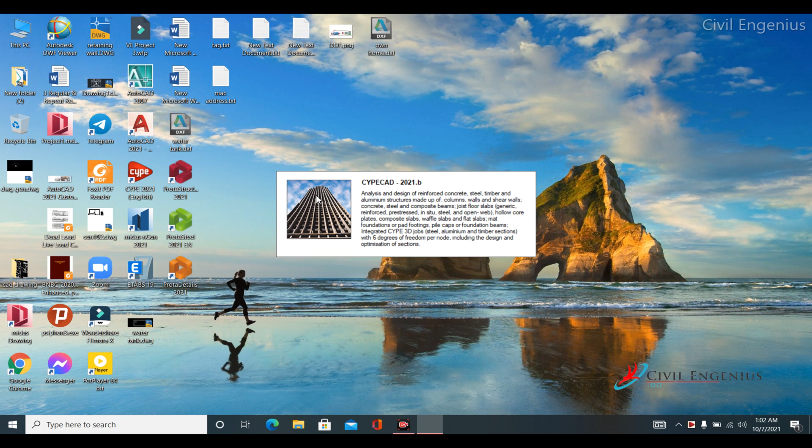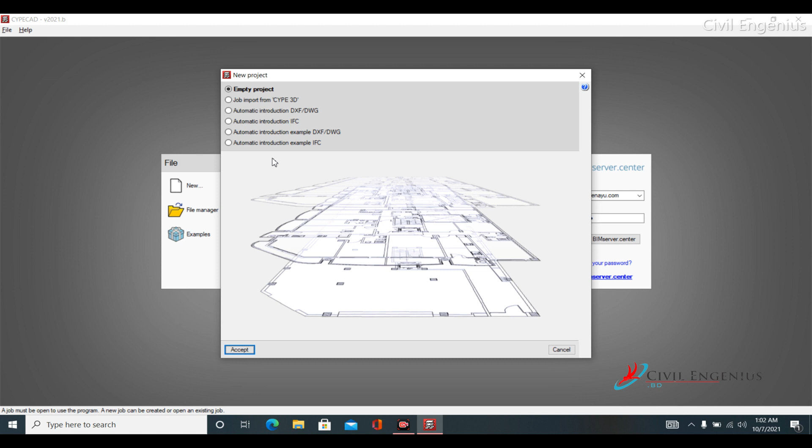Today we will see how to analyze and design an underground water tank in CYPECAD. So let's get started. Open CYPECAD. We will start with a new project. File name. Click on accept. Click on no. Select empty project. Accept.

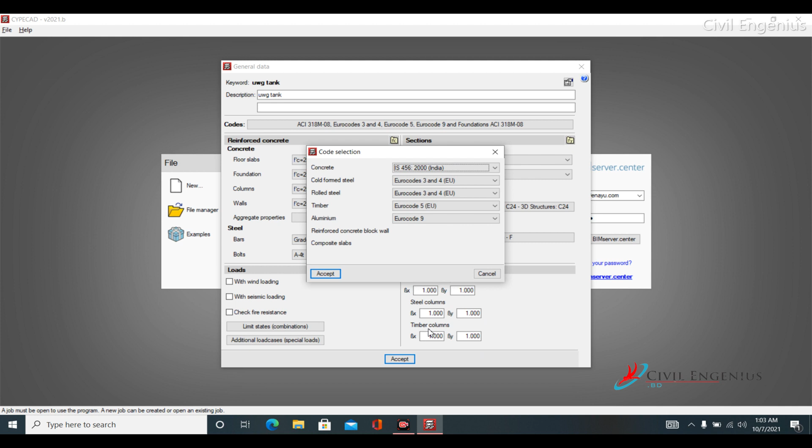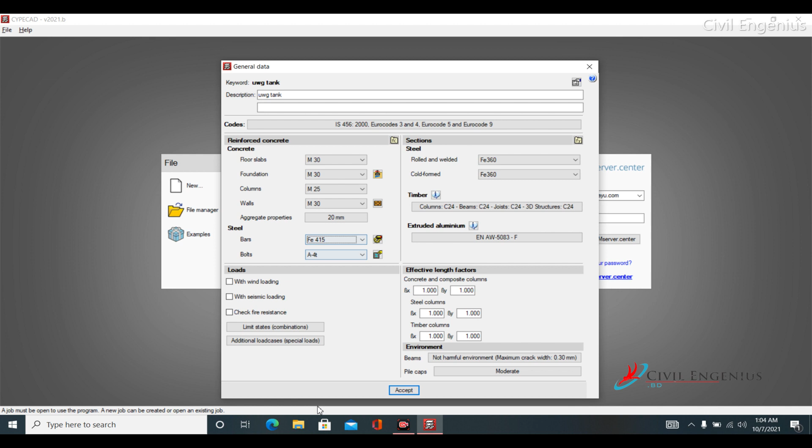Here we will select our design code. Concrete. I will go with IS 456 2000 Indian code. Click on accept. Yes. Now select concrete strength: M30 for slab, foundation M30, wall M30. Aggregate properties I will keep 20 mm, accept. Steel bars I will keep 415, click on accept. Okay, click on accept.

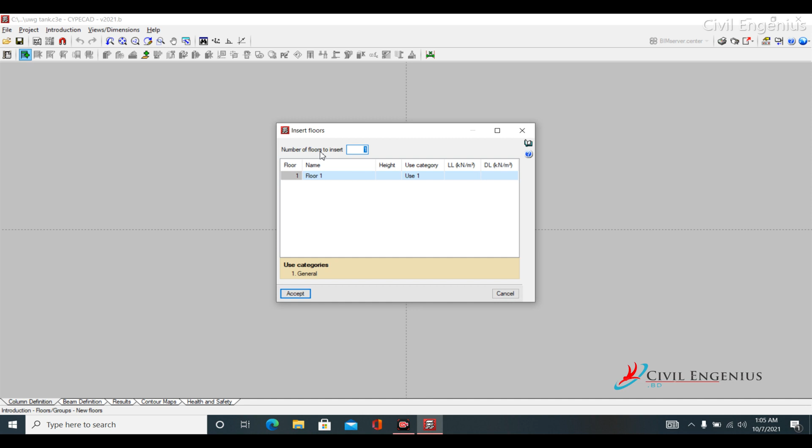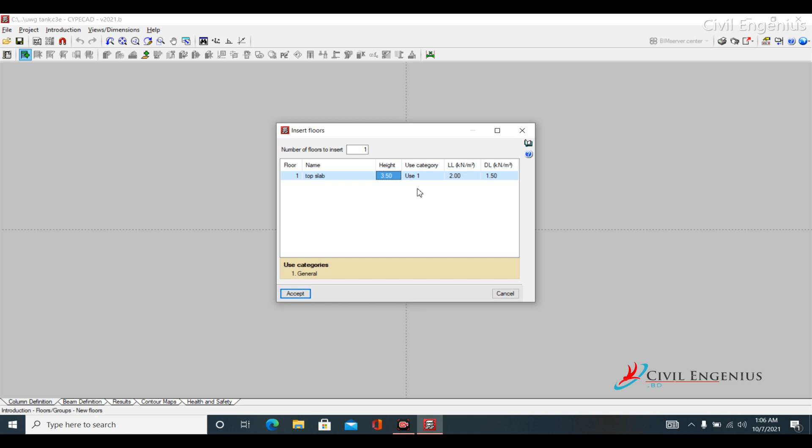Now go to story definition, new floor, keep single, accept. Number of floors to insert 1, rename it top slab. Live load on top slab 2 kN per meter square, dead load like floor finish I will keep 1.5 kN per meter square. Water tank height is 3.5 meter. Click on accept. Now go to edit floor.

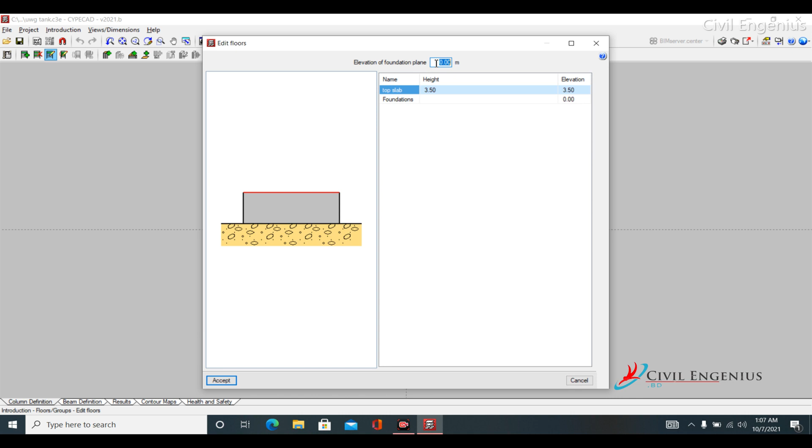We can see here our story is on ground surface. As an underground water tank, it will be inside the ground, so elevation of foundation plane minus 3.5 meter. You can see here the floor has gone inside the ground. Rename foundation bottom slab. Click on accept.

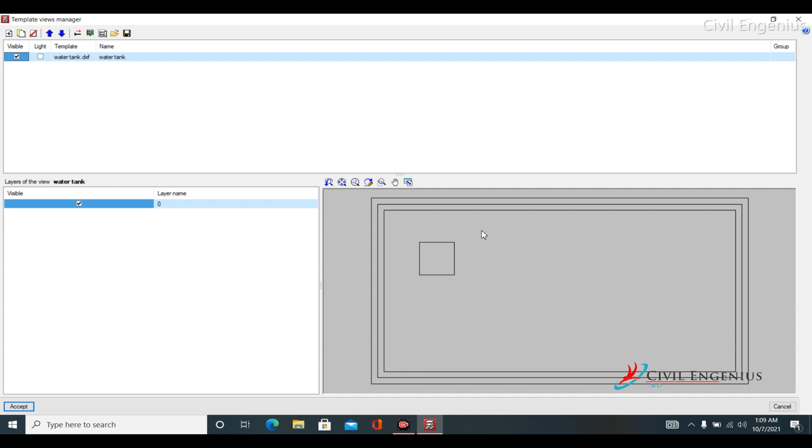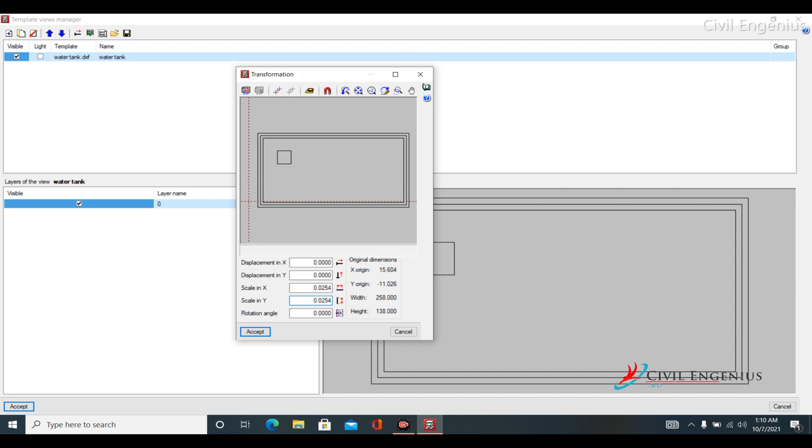Now add DWG file. Click on DWG file. Add water tank. Accept. You can see here our plan. My drawing is in inch scale, so I have to convert it from inch to meter. Click on scale, x direction 0.0254, same as y direction 0.0254. Click on accept. Yes, this is our plan.

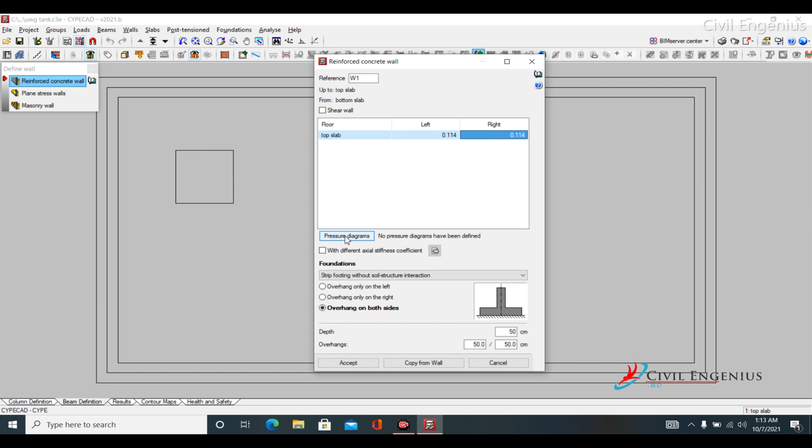Now go to beam definition, go to wall, define wall, reinforced concrete wall. Our wall thickness is 9 inch, so left side 0.114 meter from center, same as right side. Click on pressure diagram. Pressure diagram list.

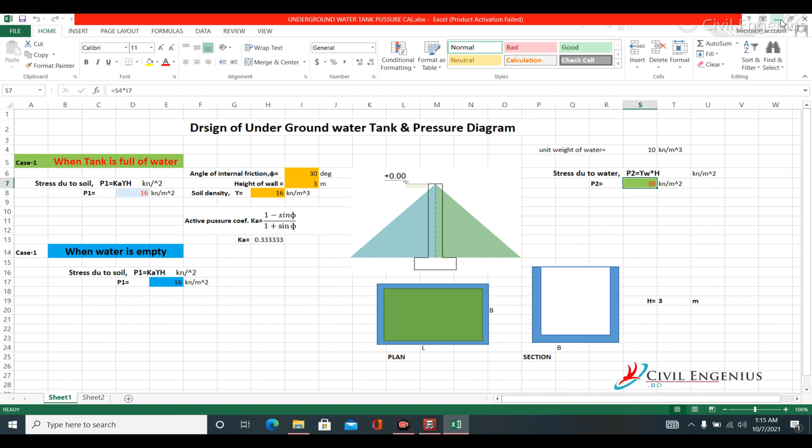Now add soil pressure. Soil pressure with infill up to elevation I will keep 0 meter. You can see here at the top soil pressure will be 0. Unit weight of soil, I will keep it 20 kilonewton per meter cube. Submerged unit weight is applicable for water table. If you have any water table, then you have to input this value. If you want to add water table, just click here and input elevation height. I will go without water table, so uncheck this.

Internal friction angle, I will keep it 30 degree. This value will be changed according to your soil report. You can also select from here, then send, accept. Yes, you can see here the change. Internal friction angle 37 degree. Now I will keep it 30 degree.

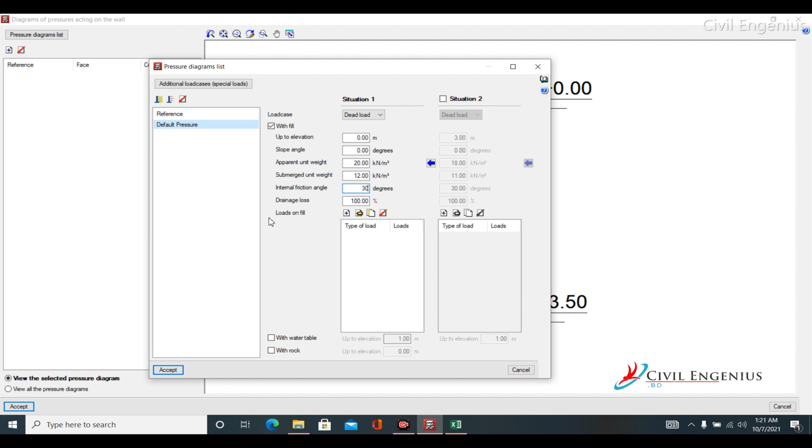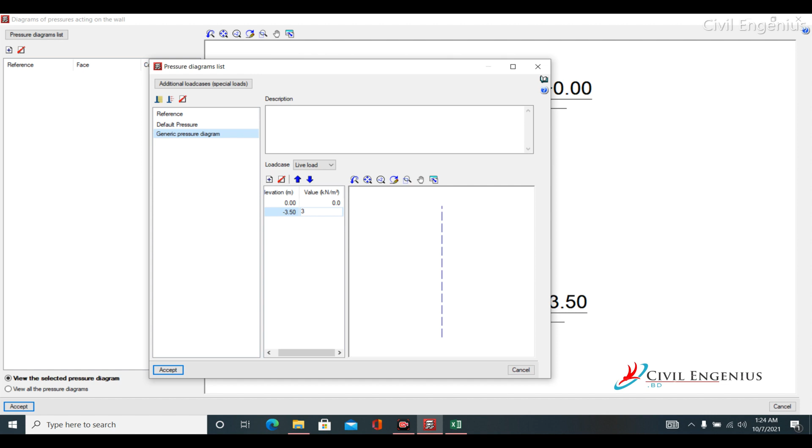Add water pressure. Click on generic pressure diagram. Water pressure will be live load type. I will add two levels. Elevation 0 meter at top level. At top level water pressure will be 0. At bottom minus 3.5 meter, and water pressure will be unit weight of water into water height. Unit weight of water 10 kilonewton per meter cube, water height 3.5 meter, so 35 kilonewton per meter square. You can see here 35 kilonewton per meter square at bottom level water pressure. Click on accept.

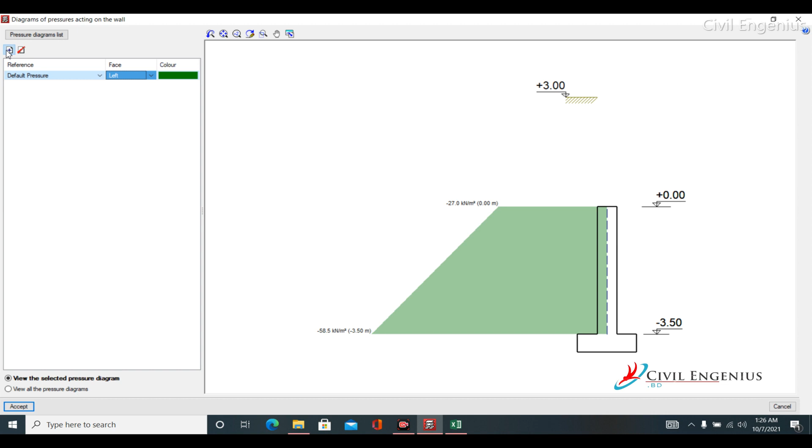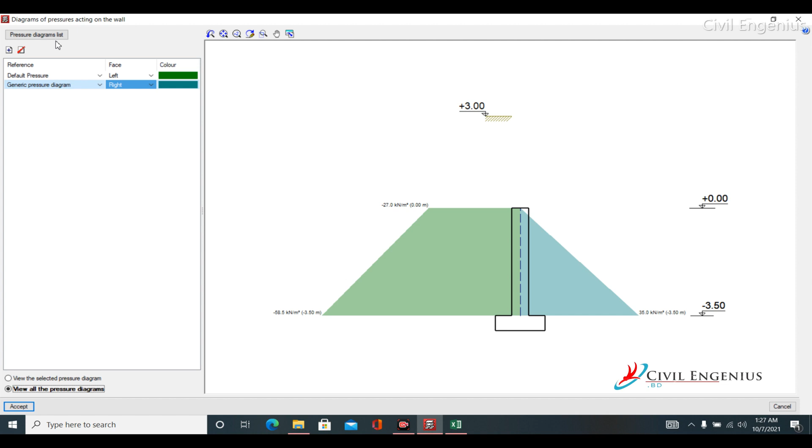Soil pressure from left face, you can see here. Click on add. Water pressure from right. Click view all the pressure diagrams. You can see here. Here I have to edit this value at the top, 27 kilonewton per meter square. Here will be 0. Pressure diagram list, up to elevation will be 0. Click on accept. You can see here at the top level will be 0. Click on accept. Go to foundation.

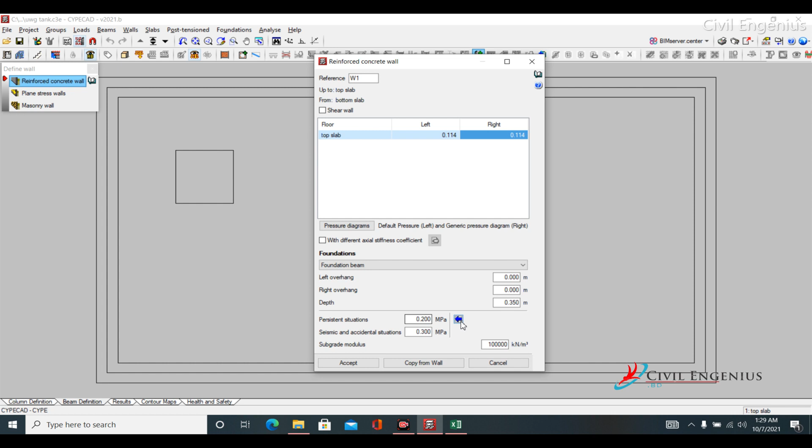You can select fixity and also can select foundation beam. I will go with foundation beam. Depth will be same as bottom slab thickness, 35 centimeter. Bearing pressure, you have to input this value according to your soil report. Now I am selecting from here, dense sand, accept. Click on accept.

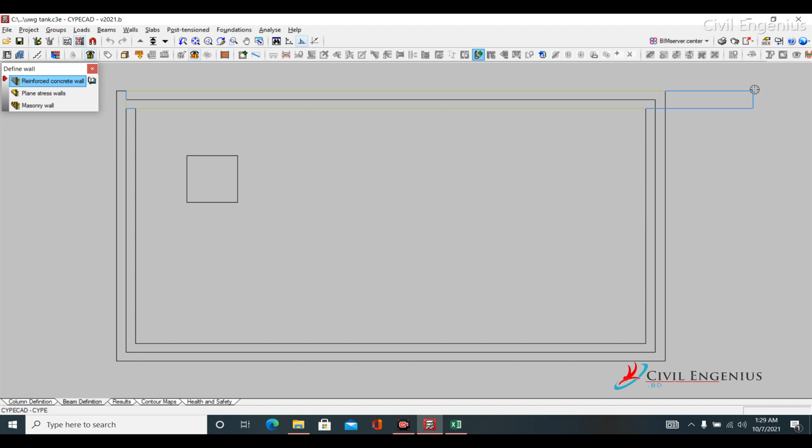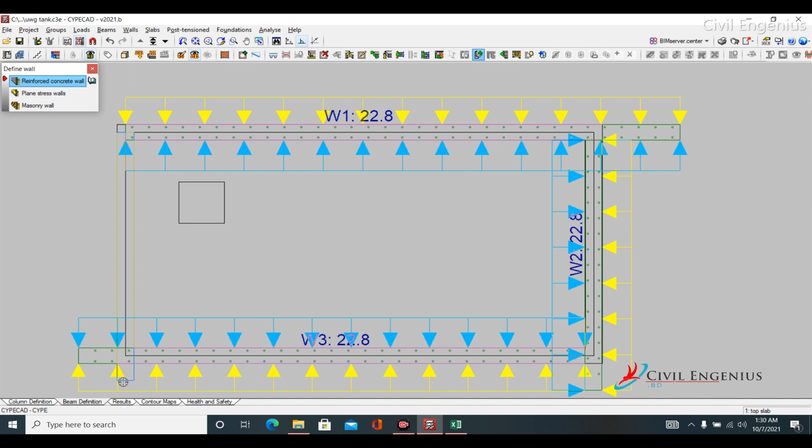Now draw wall. Snap option. Okay. Extend this wall. Go to wall. Extend wall. Now delete extra portion. Go to wall, delete, select second option.

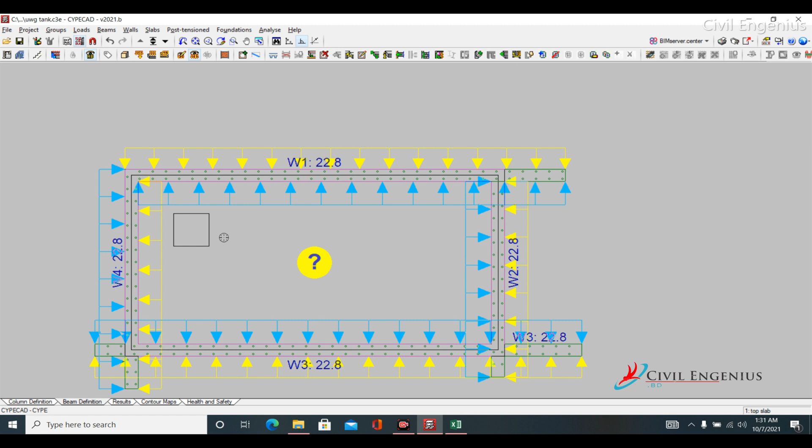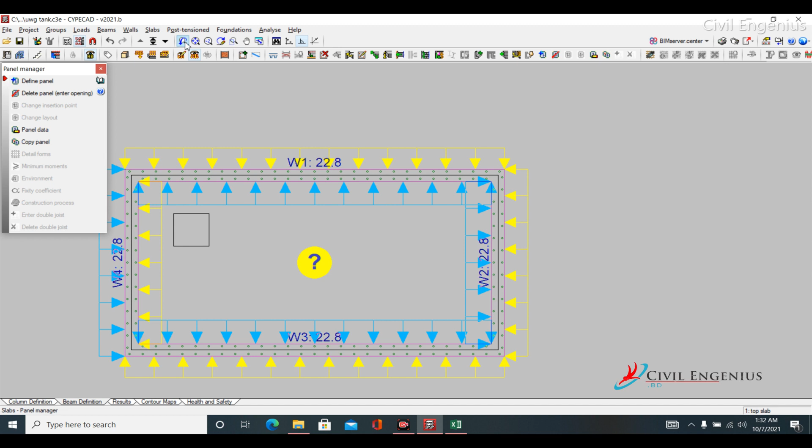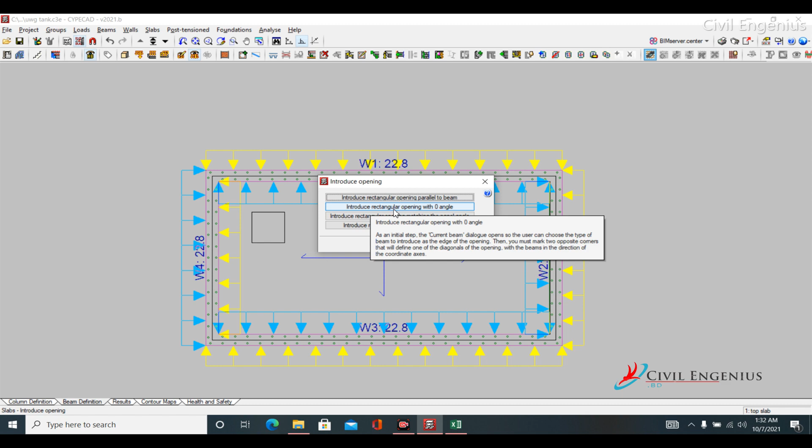Now define slab. We are in top level. You can see here. Go to slab, panel manager, define slab, flat slabs, thickness 15 centimeter. Click on accept and click here. Now introduce opening. Go to introduce opening. Introduce rectangular opening with 0 angle. Non-construction beam. Select non-construction beam. Click on accept. Okay, go to snap option. Active. In point. You can see here opening is done.

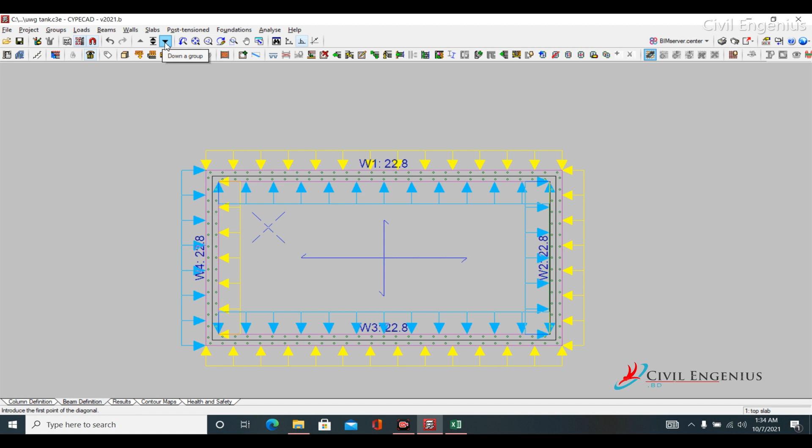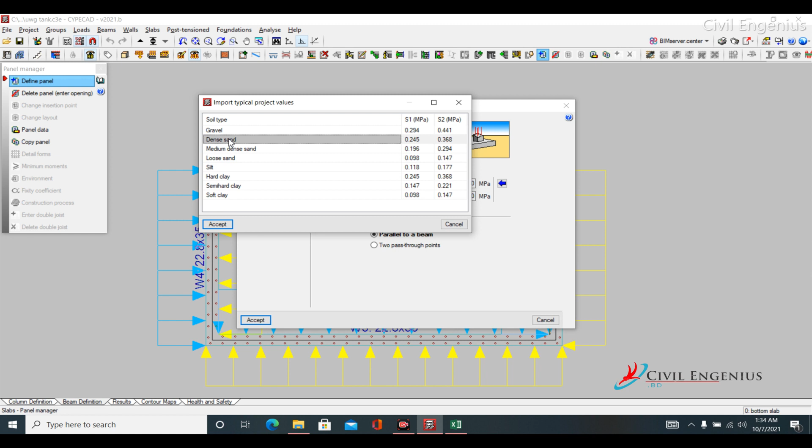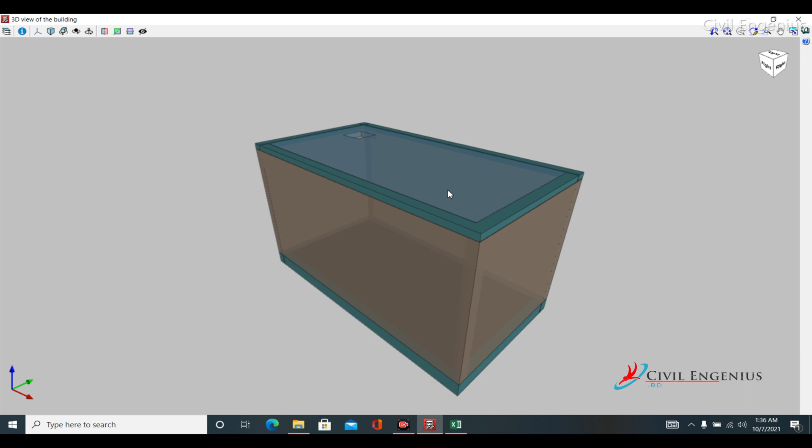Now go to bottom slab. Click here. Down. You can see here bottom slab. Define bottom slab. Go to slab. Panel manager. Define panel. Mat foundation. And thickness will be 35 centimeter, same as depth of foundation beam. Bearing pressure of soil, I will select from here dense sand. Click on accept. Yes. Click on accept and click here. Now close it. We can see 3D view of what we have done. Click on 3D view. Close it.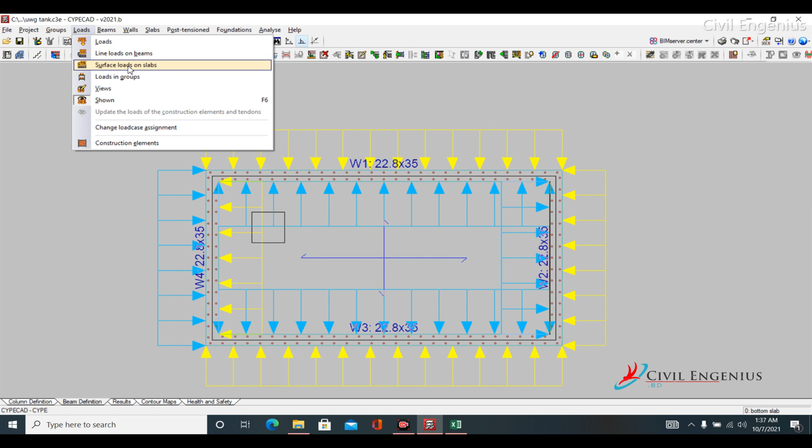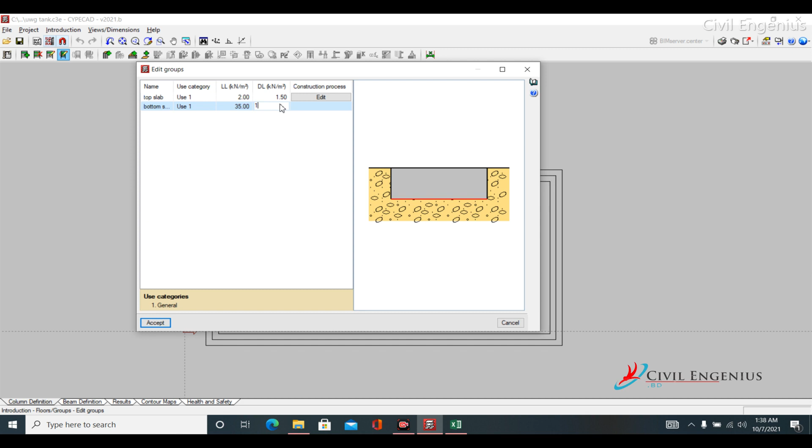Now assign load. We can assign load in two ways, from beam definition, load, surface loads on slabs. Another way from column definition. Click on column definition. Go to edit group. You can see here top slab load. Now I will input water pressure on bottom slab. Live load will be water pressure load: unit weight of water into full height of water. Unit weight of water 10 kN per meter cube, and full height of water 3.5 meter, equal to 35 kN per meter square. 35 kN per meter square, and floor finish 1.5 kN per meter square. Click on accept.

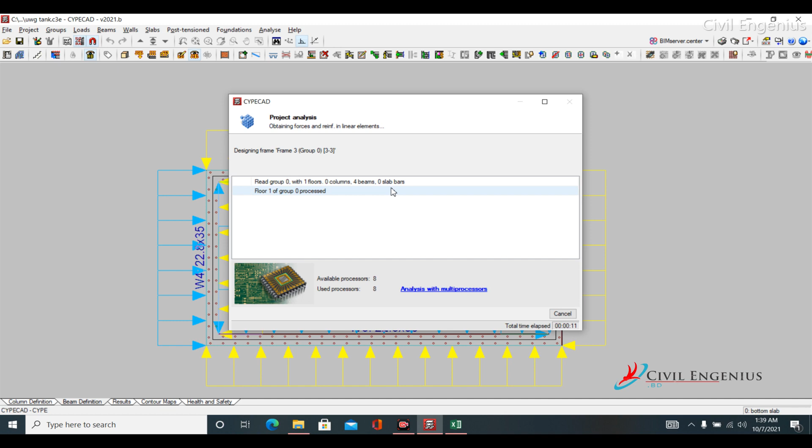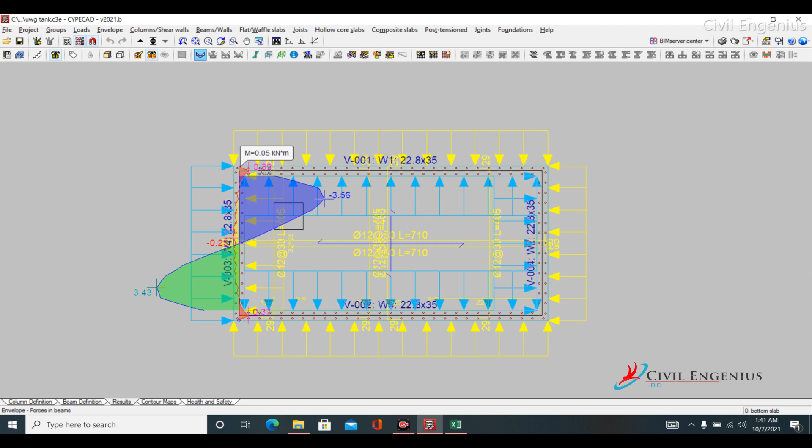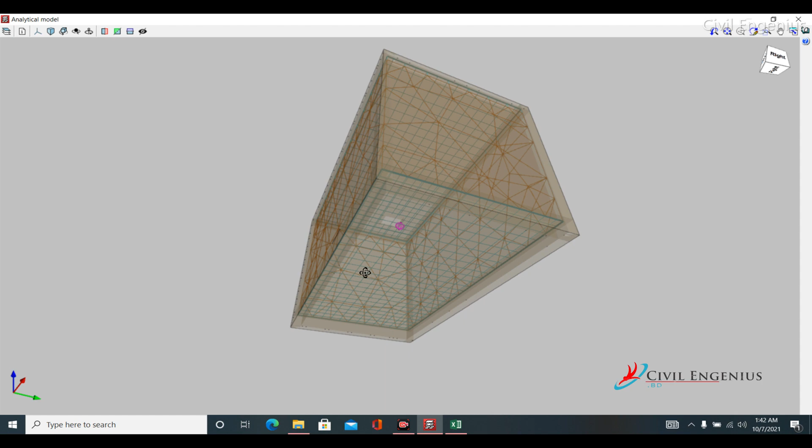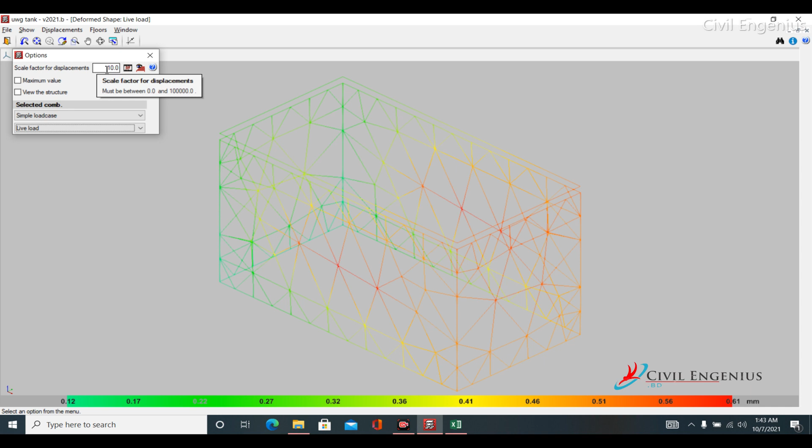Now go to analysis. Including foundation. Analysis is done. Close. Go to result. We can see force in beam, combination. Accept. Click here. You can see here force. We can also see mesh view. Go to analytical model. This is our mesh view. Also check deformed shape. Dead load. Live load. We can also see the animation. Scale 1000. Click on animation. You can see the animation. Close.

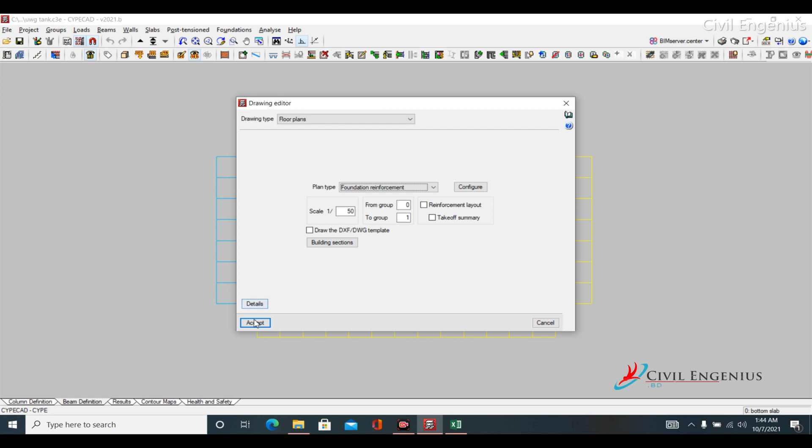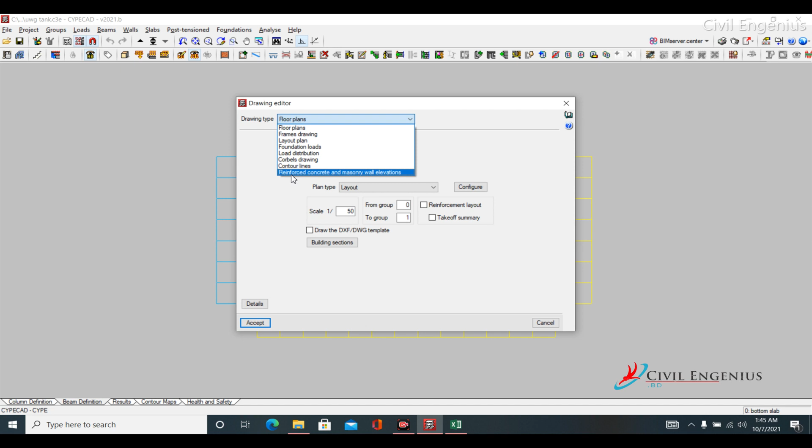Now generate drawing. Go to drawing. Click on add. Drawing type floor plans. Plan type foundation. Accept. Again add, foundation reinforcement, add, accept, transverse bottom reinforcement, add, top slab longitudinal reinforcement, add, top slab transverse top reinforcement, accept, add, drawing type, reinforced concrete and masonry wall elevations. Click on reinforcement, reinforcement layout, click on accept, accept.

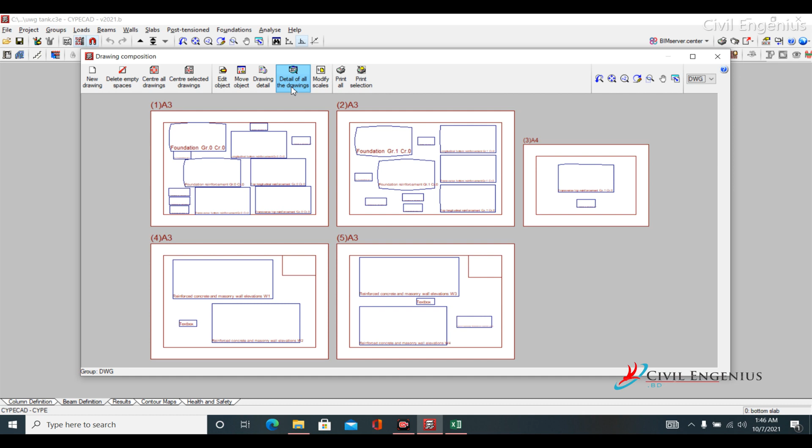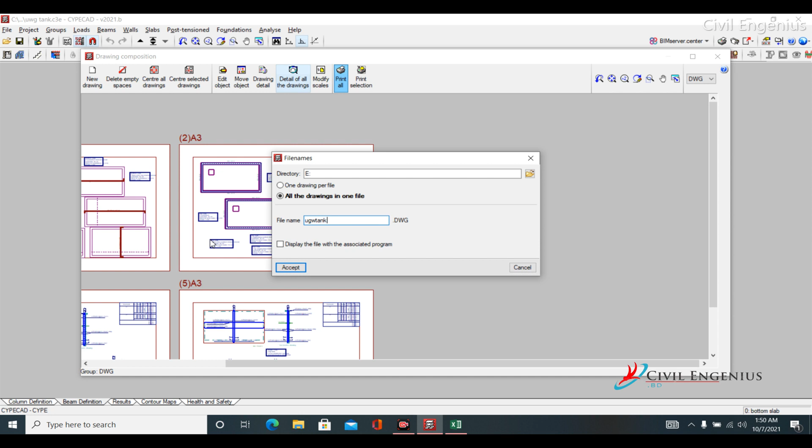Detail of all the drawings. You can see here all the drawings. You can export this drawing in DWG format. Click on print all, file location, accept, file name UGW tank, all the drawings in one file. Click this option to get all the drawings in one file. File name UGW tank, click on accept. You can see here all the detailing. In this way you can design an underground water tank.